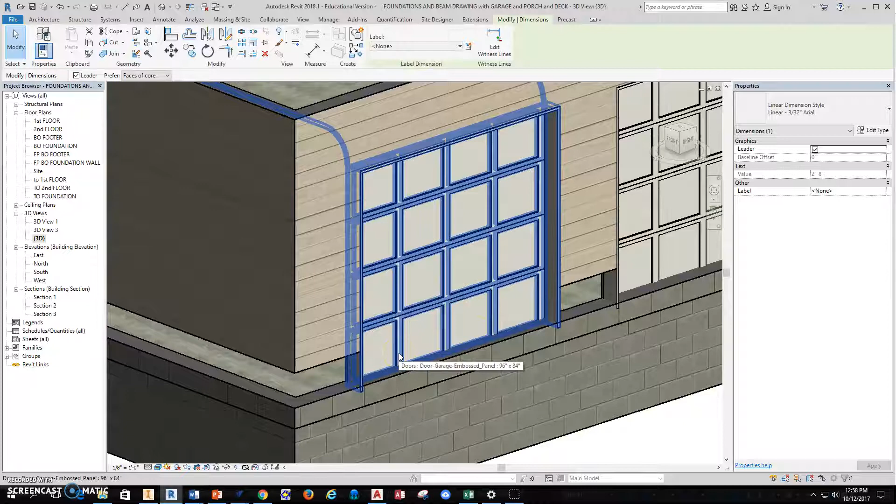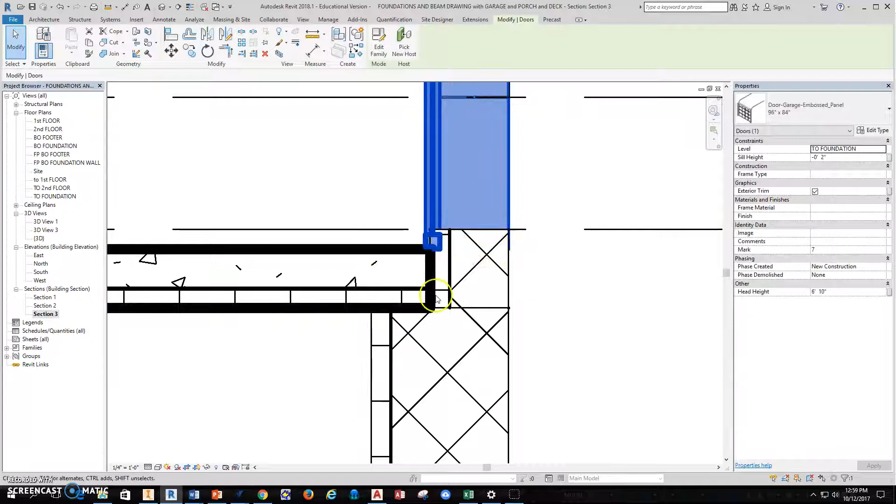Today we're going to talk about how to finish off a garage so that your garage doors will actually be able to sit down onto your concrete, by removing a piece of wall here that is a 6-inch wall. If we look at a section view, you can see that our garage door seats itself onto the concrete, yet the concrete does not apron out into the threshold for the garage. So we're going to have to remove this 6-inch cinder block where the garage door is located and create an area for the concrete apron.

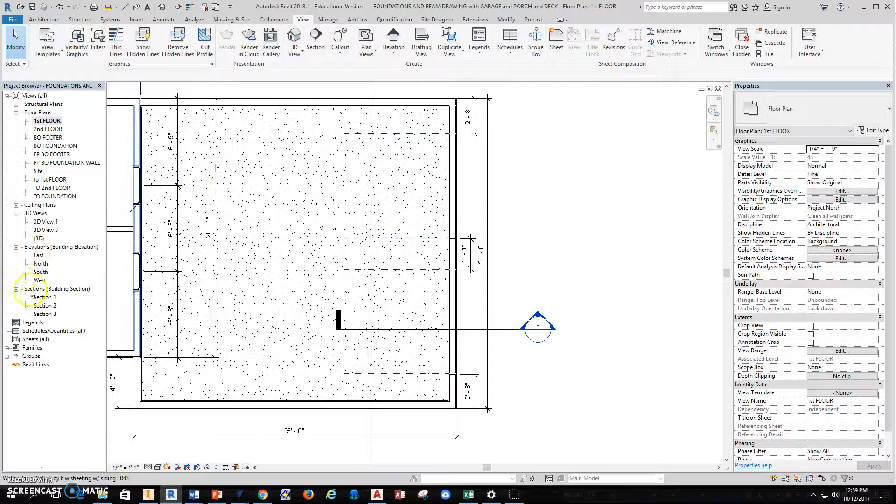To do this, I'm going to go to my top of foundation view. First I'm going to go to my first floor, and I want to make sure my garage doors are spaced equally and evenly where I want them located in my garage. This is critical because once I cut out that 6-inch block running underneath my garage door, if I have to move my garage door, it becomes a much larger editing issue. So first make sure the garage doors are located where you want.

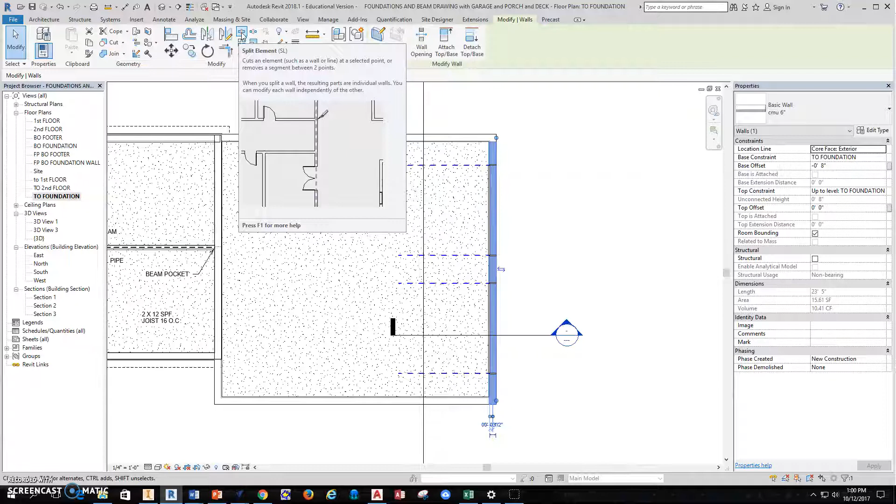Then I'm going to head to my top of foundation view and start to use what's called— if I select my wall, I can come over to my edit tools. My edit tools pop up, and this is my modify toolbar where I'm going to be working. I'm going to come up to the split element tool, because all I want to do is literally split or cut the wall. When I select the split element tool, my cursor turns into what looks like a little knife, similar to an X-Acto knife.

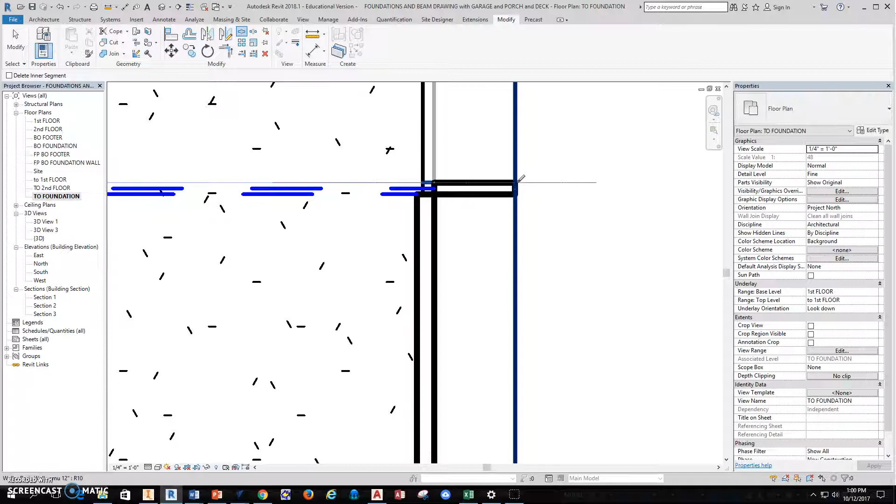So I'm going to zoom in on the wall, and I want to select the area on the wall right where it's the outside of the jamb material, and click. Once I click, I can see a line showed up—this blue line is an additional line, and that's where I've just cut this wall. So I'm going to come down to the other side of that jamb material on the wall, click again, and now you can see I've cut that wall.

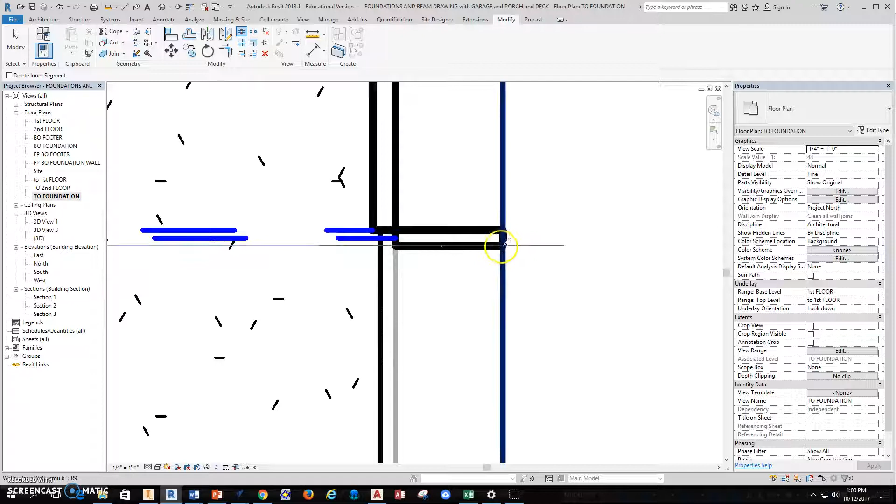I'll keep going down through and cut this wall, then come down to this one and cut this wall too. Now I'm finished cutting, and I can right click and hit cancel, or hit escape—either one works. Then I want to go back to my 3D view, and I should be able to mouse over top of that 6-inch cinder block layer and see that I now have individual pieces in this wall.

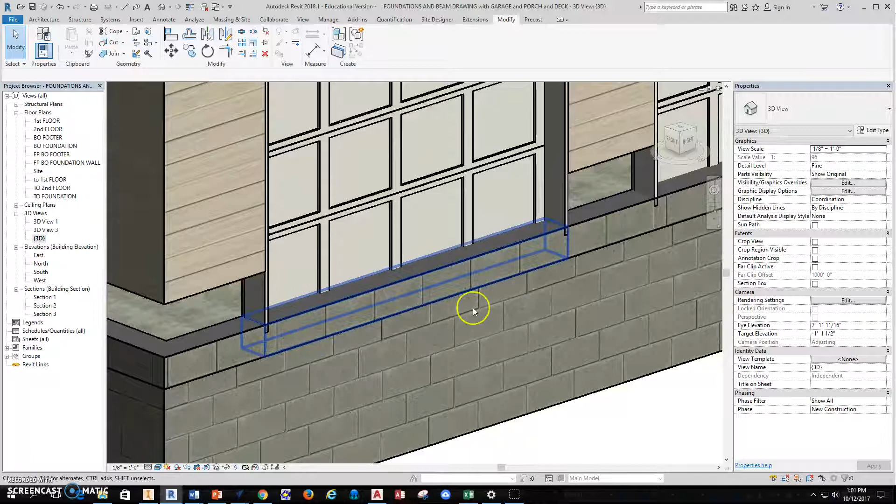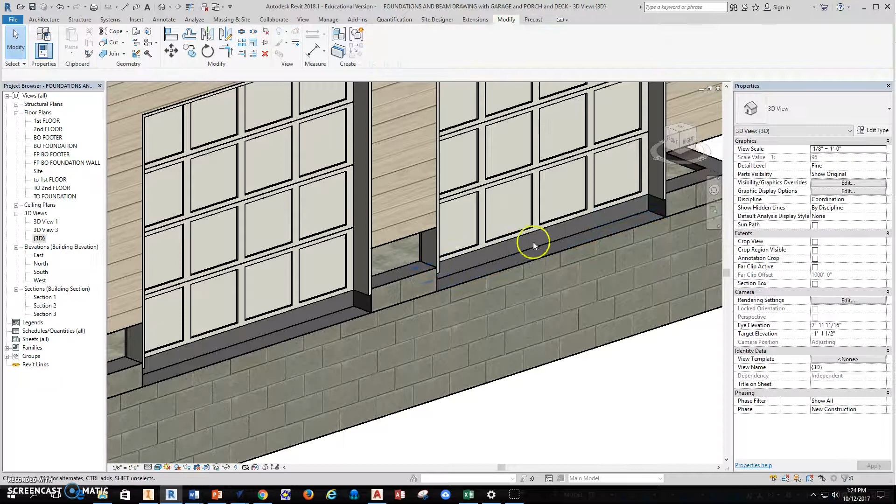If I go ahead and select that interior piece of the 6-inch cinder block that I created a cut for, and hit delete, I can now remove that section of the cinder block. After you cut and then select that 6-inch wall and delete it, you should see a gap underneath of your garage door.

If I go in and look at my section view, that garage door should actually be at the same level as the top of the concrete slab, but there should be nothing here for the concrete slab apron. So that's what we're going to work on next.

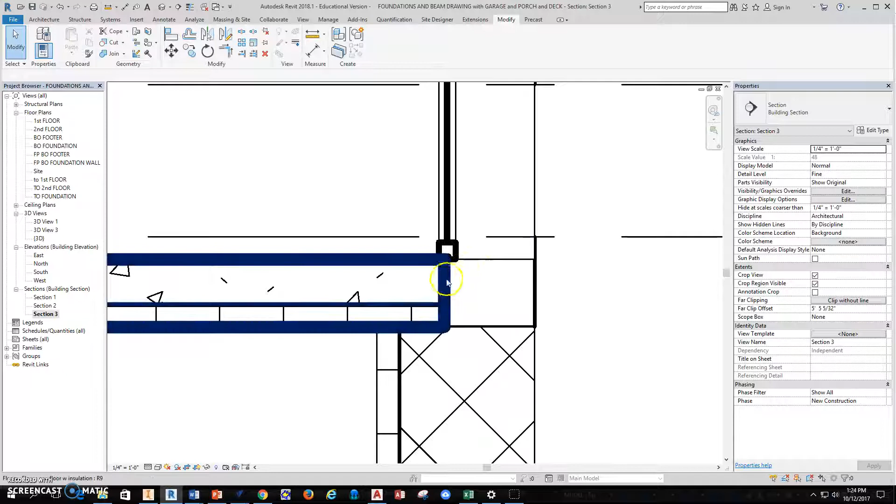Now, there's a detail that we need to be aware of. Given that this is an insulated concrete slab, we would not want to run the concrete slab out into this area for the apron, because then we'd have insulation running out to the outside here. So what we need to do is create just a small concrete slab that is separate from the main concrete slab and lay that underneath of our garage door.

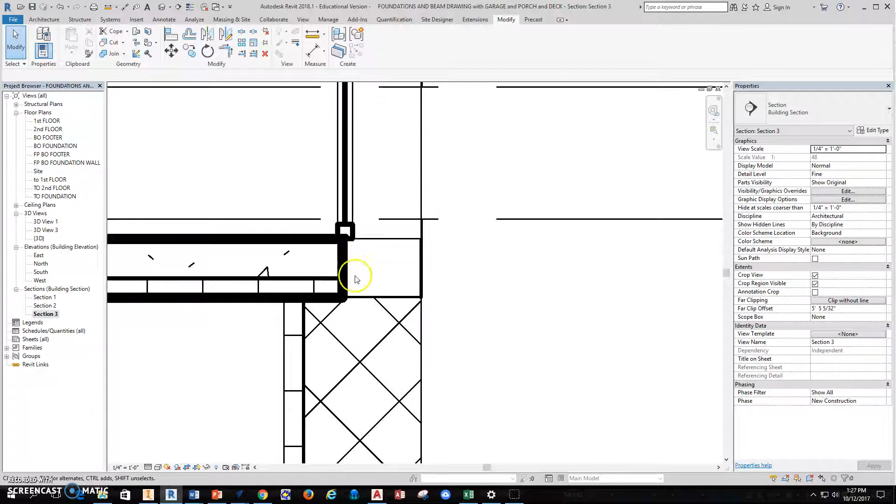So to set up a solid concrete slab underneath of the garage door to create the apron, I'm going to go ahead to the top of the foundation.

So I'm going to go to the top of the foundation level, grab the architecture tab, grab my floor tab, and create a concrete floor that is going to be 6 inches thick.

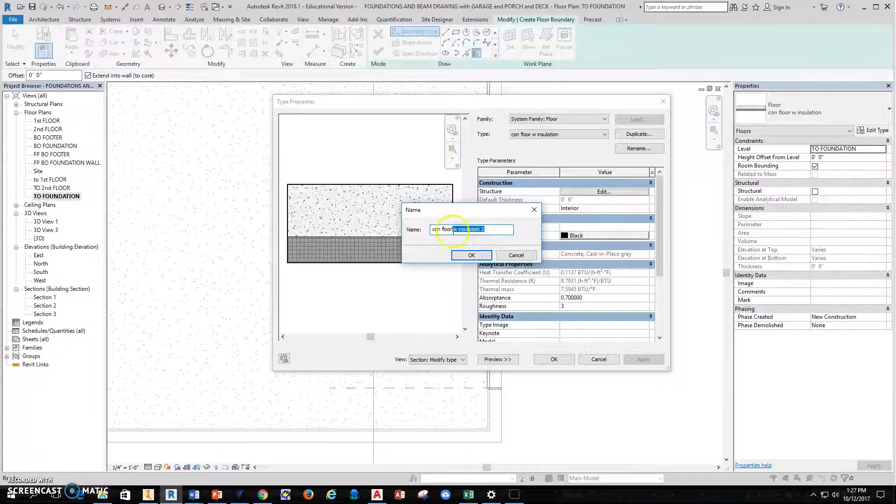I'm going to grab my edit type, and with my concrete floor with insulation, I'll go ahead and duplicate it, then get rid of concrete floor with insulation. I'm going to call this con floor apron.

That apron is going to be underneath of the concrete, underneath of the garage door. So I do not need this 2 inches of rigid foam insulation, so I'm going to go ahead and delete that.

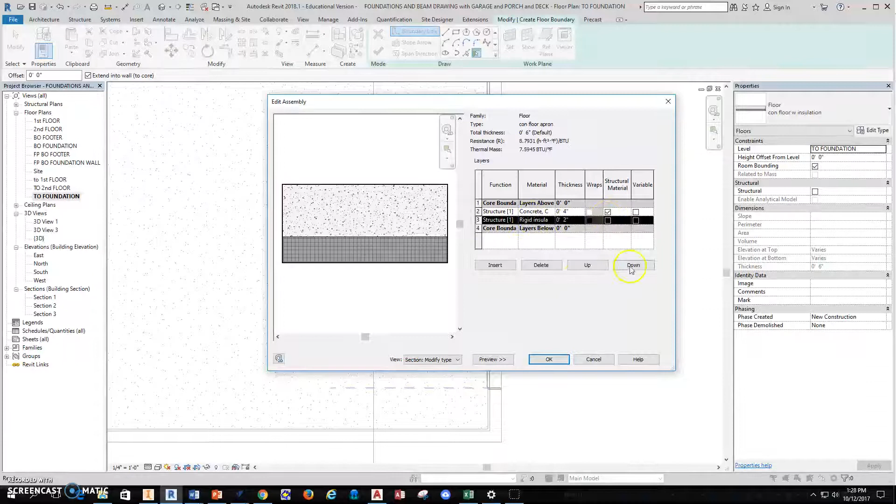I'm going to change my concrete thickness so it's not 4 inches, but 6 inches, because I need to actually fill that whole cavity in with concrete. I'll go ahead and hit OK, and once I've done this, I can hit OK again.

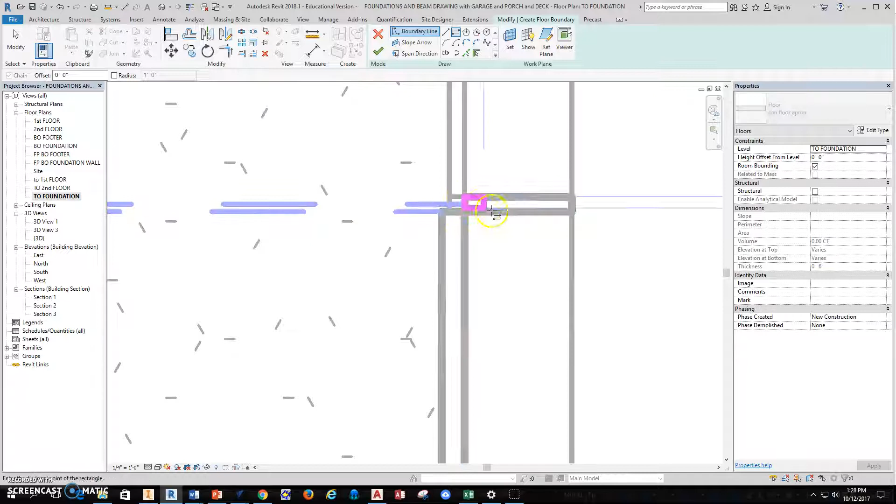Then I'm going to create a small concrete floor underneath of where my garage door is located. I'm going to let the floor extend out past the garage by approximately 1.5 inches. That 1.5 inches is going to represent and give space for when it's actually framed, given the size of lumber.

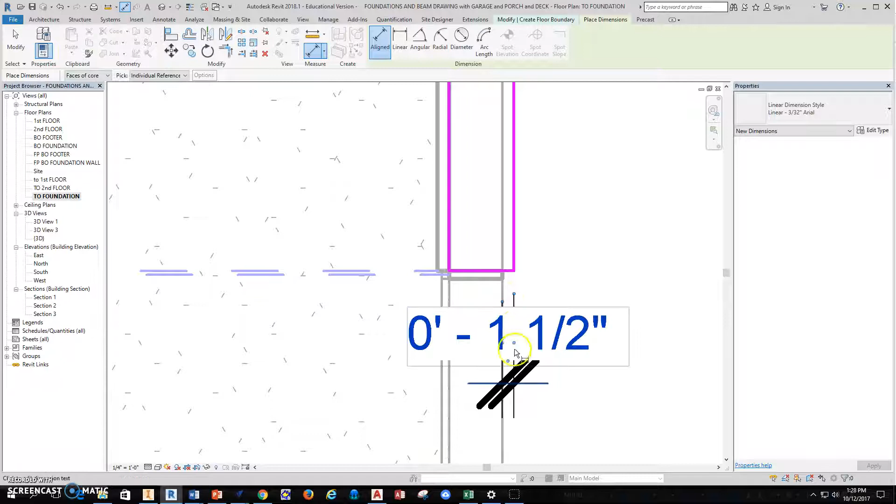So a piece of lumber would be bolted to the side of the garage, then another piece of lumber would be attached across the face of this garage when it's formed and the concrete is poured. So your apron should extend past the edge of the foundation wall by about 1.5 inches.

Once I do this, I'm going to make sure that the level this is poured to is lower down than the top of the foundation. I believe it's going to have to be lowered down by 2 inches.

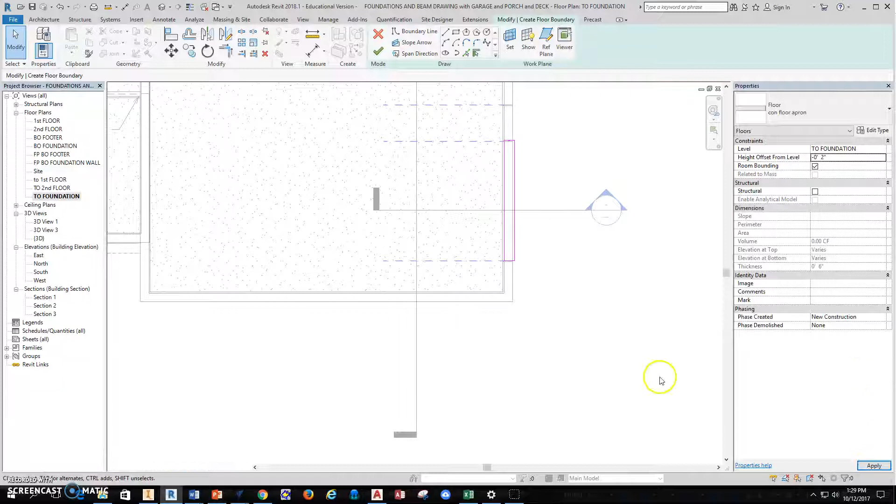Once I do this, I'm going to hit apply, hit the green check, and always say no when it asks 'Would you like walls to attach to the bottom?' For some reason that always seems to create problems and issues.

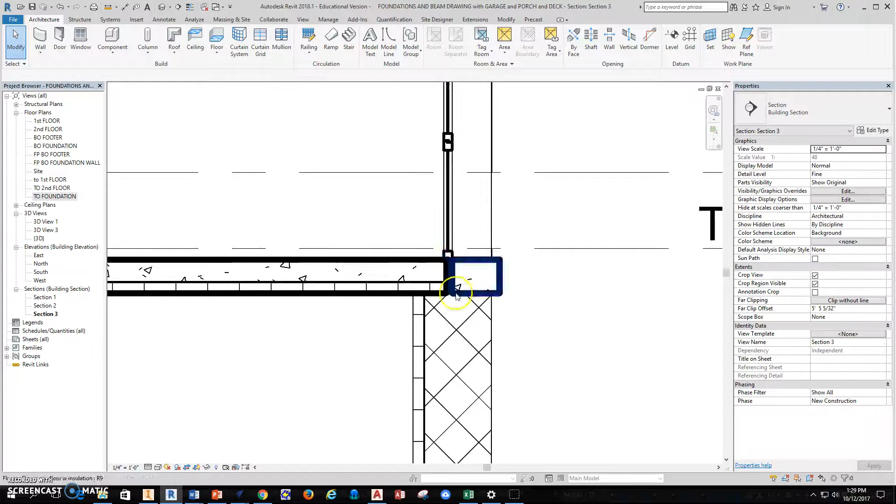Now I can see this is the concrete slab that creates the apron for my garage door. The other thing I'm going to do quickly is change the thickness of the lines here so I can see a little more detail on my floor system.

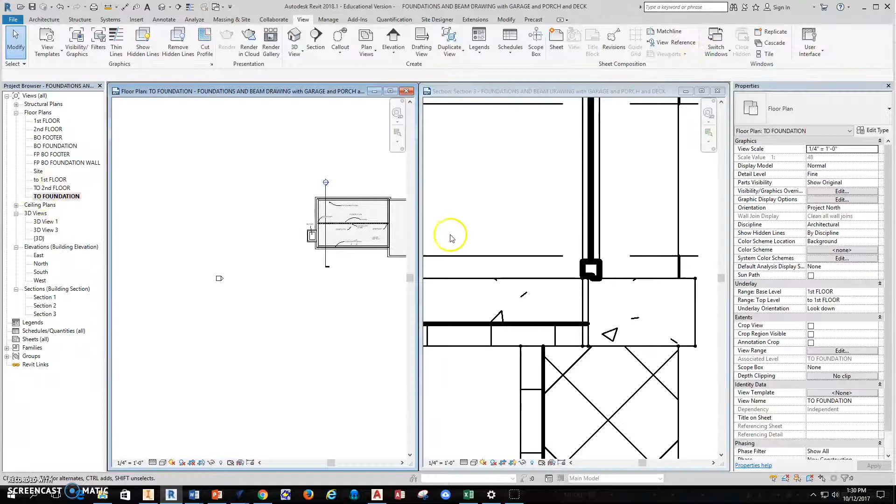Then looking at the floor, I have a little overlap, so I'm going to go ahead and reassess. I'm going to open up the top of foundation, and tile these so that I can actually work with both of these at the same time.

I'm going to select the slab, go over to my top of foundation, hit edit boundary, and then I can start to see where that slab is actually located. So it looks like the slab is located here, and I'll hit my green check, always say yes.

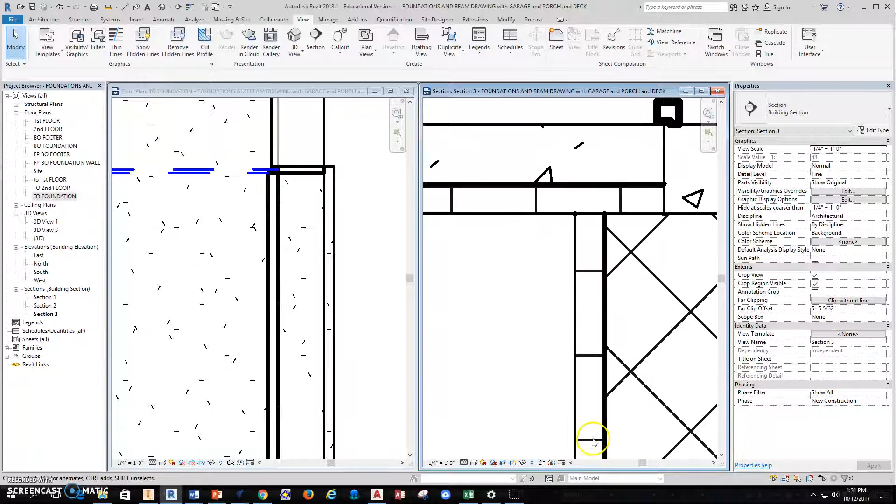Now I can see that my slab would all be considered one solid slab, even though I'm building it in 2 different pieces here. When this is actually constructed, the insulation would come up on the inside of the stem wall, the insulation underneath of the slab would come across this point and stop, and then when the concrete's poured, this would all be poured as one continuous pour.

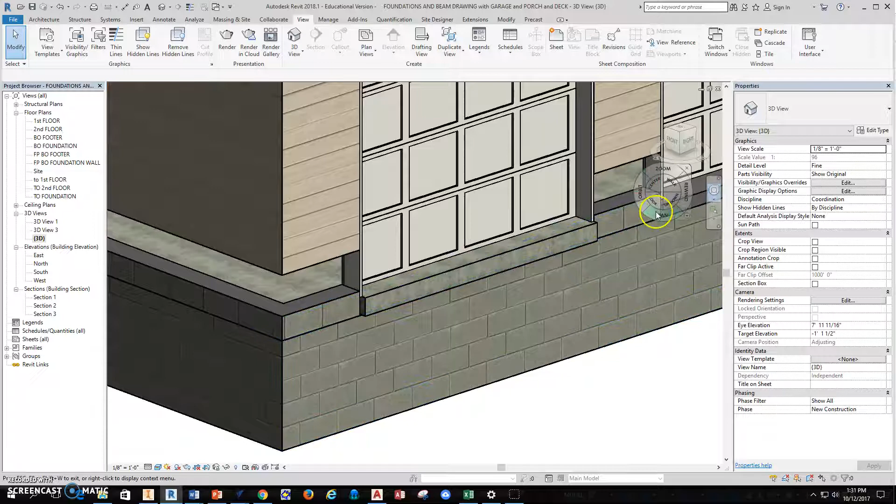But to model this properly in REVIT, this is the most effective way that I've seen to be able to do it. That way, when you look at this in your 3D view, you can actually see it clearly.

You can turn and then see that the garage door is now seated on that apron. As I spin my door around, you can see that it's seated on the apron.

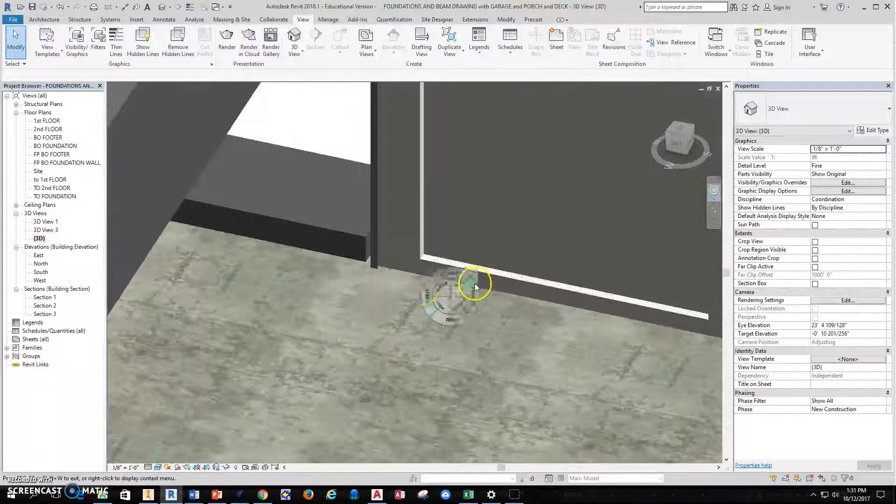If I go ahead and spin this thing around to the inside, I can also see that my garage door is sitting on the concrete itself. I have no lip or bump from that 6-inch wall to deal with and run around with.